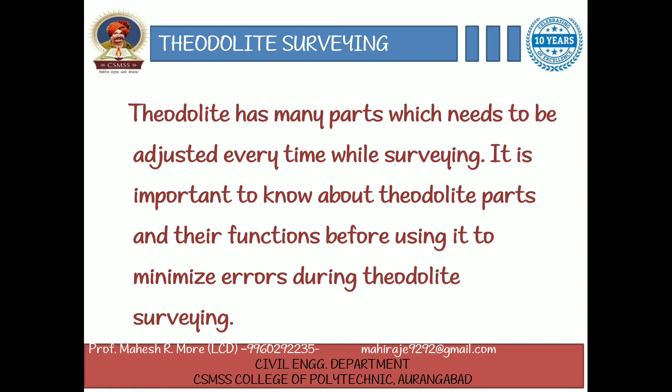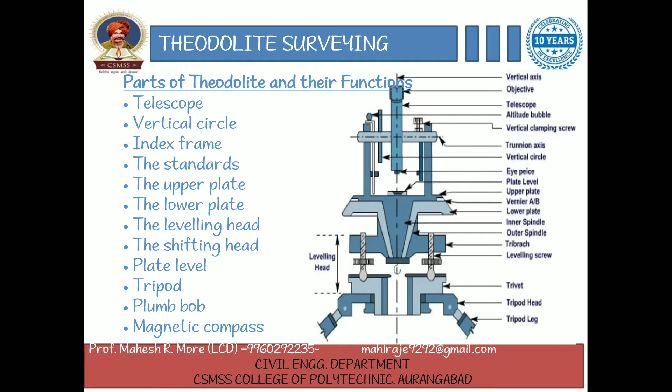In this picture, we can see the various parts of the theodolite like the telescope, vertical circle, index frame, the standards, the upper plate, the lower plate, the leveling head, the shifting head, plate level, tripod, plumb bob, and magnetic compass. Let's see in detail the component parts of the theodolite.

First one is the telescope. The telescope is pivoted between the standards at right angles to the horizontal axis. It can be rotated about its horizontal axis in a vertical plane. The telescope is provided with a focusing screw, clamping screw, and tangent screw.

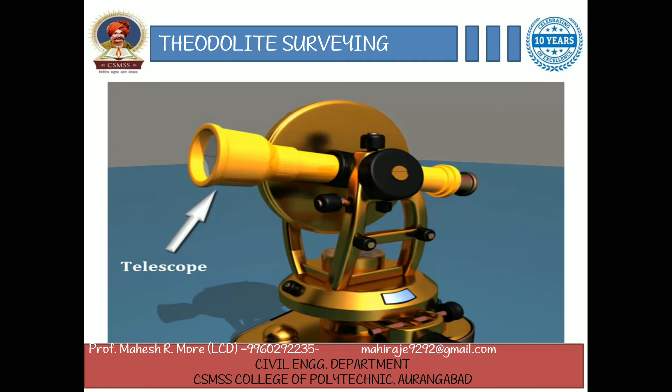Next one is the vertical circle. The vertical circle is rigidly fixed with the telescope and moves with it. It is divided into 4 quadrants. Each quadrant is graduated from 0 to 90 degrees in opposite directions, with the 0 marks at the ends of the horizontal diameter of the vertical circle. The line joining the 0 marks corresponds to the line of collimation.

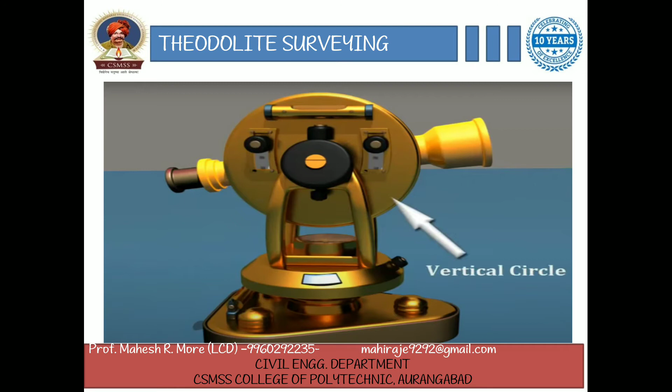The subdivisions of the vertical circle are similar to those of the horizontal circle. The vertical circle can be clamped or finely adjusted with the help of the clamping screw and the tangent screw provided along with the telescope.

Next one is the frame. It is also called the standard or A-frame. 2 frames are provided on the upper plate to support the telescope, the vertical circle and vernier scale. These frames are also known as standards or A-frames.

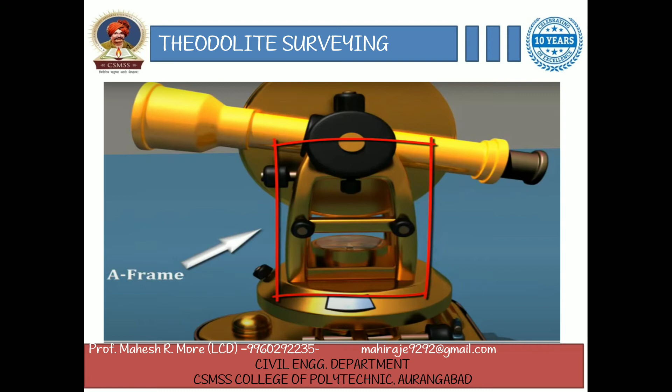Verniers. These verniers are on the index bar or T-frame. The index bar is provided on the standards in front of the vertical circle. It carries 2 verniers, vernier C and vernier D, at the 2 ends of the horizontal arm. The vertical leg of the index bar is provided with a clip screw at the lower end, by means of which the altitude bubble can be brought to the center.

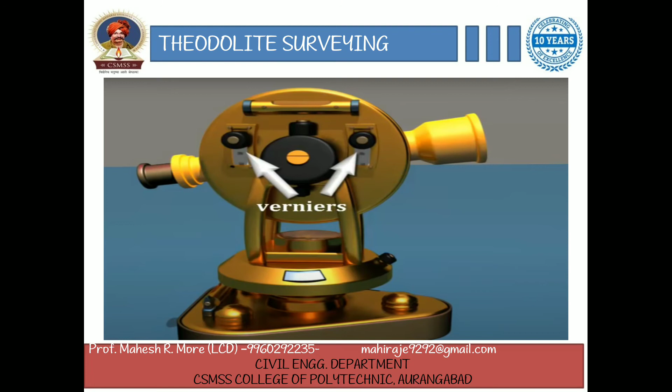Upper plate. The upper plate contains the vernier scales A and B. It is attached to the inner axis. Its motion is controlled by the upper clamp screw and the upper tangent screw. When the clamp screw is tightened, the vernier scales are fixed with the inner axis, and for fine adjustment of the scale, the tangent screw is rotated.

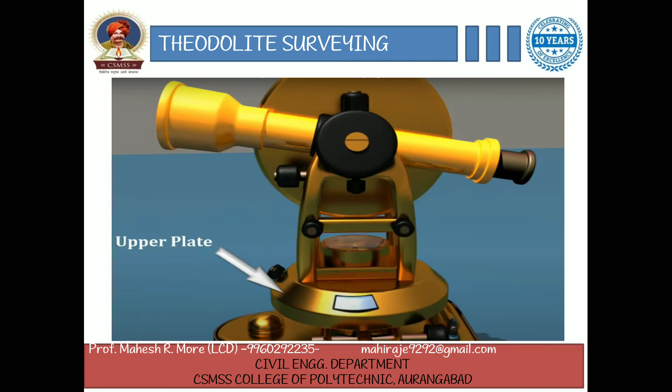Lower plate. The lower plate is attached to the outer axis and it is also known as the scale plate. It is beveled and the scale is graduated from 0 to 360 degrees in a clockwise direction. Each degree is again subdivided into 2, 3 or 4 divisions. Thus, the value of one small division may be 30 minutes, 20 minutes or 15 minutes respectively.

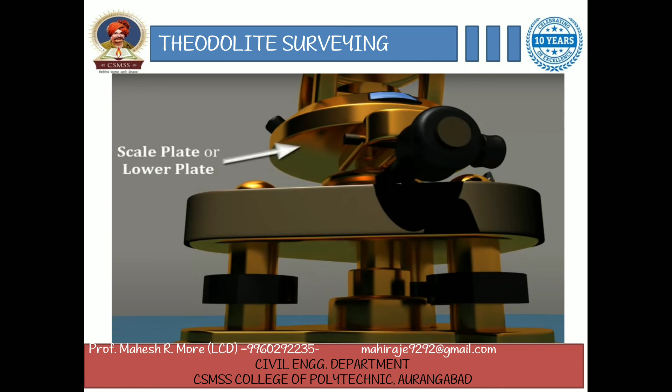The lower plate is provided with a clamp screw and tangent screw which control its movement. When the clamp screw is tightened, this plate is fixed with the outer axis. For fine adjustment of the lower plate, the tangent screw is rotated to the extent required. The size of the theodolite is designated according to the diameter of the lower plate.

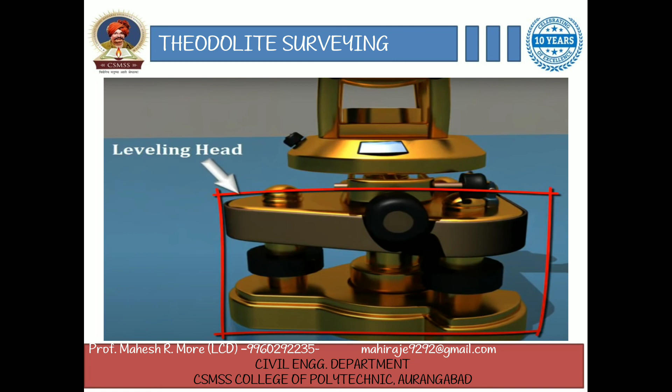Next one is the leveling head. The trivet, foot screws and the tribrach together form the body which is known as the leveling head. Next one is the tribrach plate. The tribrach is a triangular plate carrying 3 foot screws, one at each end.

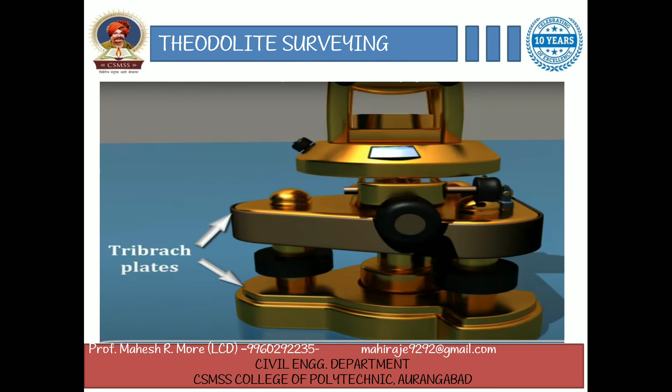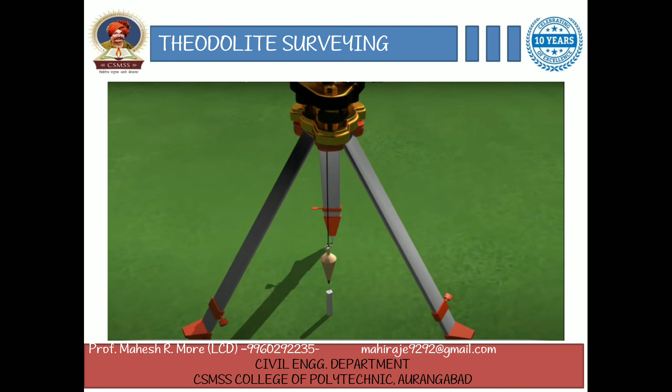Tripod with plumb bob. The tripod is used for fixing or mounting the theodolite on it, and the plumb bob is used for centering the instrument. Thank you very much.